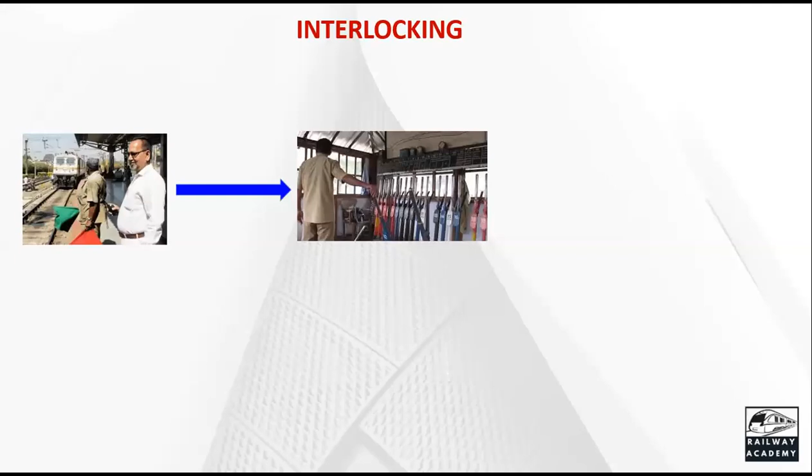In earlier days, we had mechanical interlocking. A lever man used to be there, a cabin man used to be there. You might have seen some old movies where you will come across lever frames. Nowadays, they are almost obsolete. Indian Railway has very few installations using the lever frame. This human machine interface may be a mechanical one, or a panel, or a touch screen.

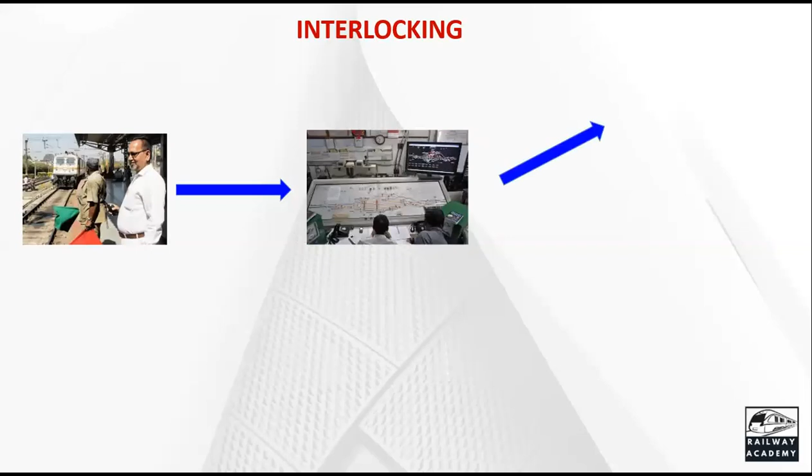With which components is he interacting? He is interacting with points. He is interacting with level crossing gates. Finally, he will take off the signal. Achieving the safety, a signal will be taken off as per the command given by the station master. As I mentioned, the station master is not interested to know what type of interlocking you are using. He is assisted by the safety system.

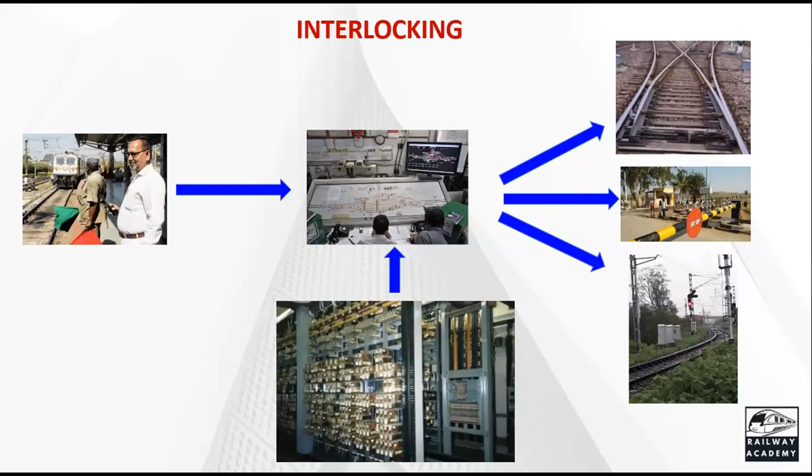Those safety systems were the mechanical lever frame, with a set of locking below this lever frame. In earlier days, we had it. Then came the next generation, relay interlocking. Then came the present one, electronic interlocking, which we'll be studying. With electronic interlocking, we are achieving safety to the highest level.

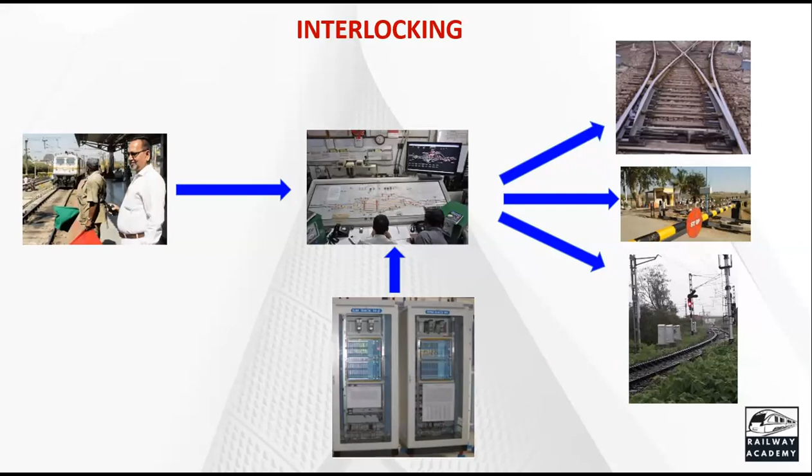The safety level is highest with the electronic interlocking system or computer-based interlocking system, where we say it is safety integrity level 4, SIL 4. All the components of electronic interlocking, computer-based interlocking or communication-based interlocking are suitable for SIL 4. They are certified for SIL 4, safety integrity level.

Interlocking is a process. In olden days, probably our grandmothers used to cook the food on the chula. And this chula was almost made in the house itself. The ladies used to make it, or maybe some gents in the house used to help them to prepare it. For example, they are preparing the rice.

To prepare the rice, what are the ingredients? We want raw rice, water, and a vessel. To cook it, a fuel. So these are the ingredients and the process is through the fuel. The wood was used for cooking the rice. And as you know, most of you might have seen your grandmothers cooking this. The complete house will be having smoke, people will be coughing. And that was the reason why this was afterwards ruled out.

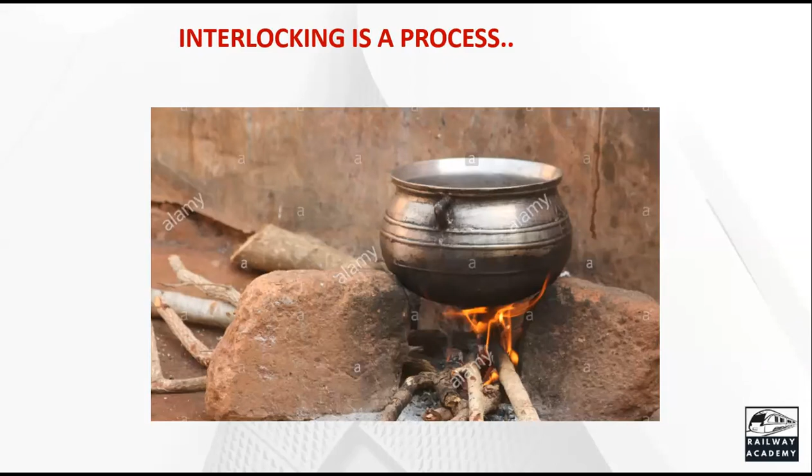Next generation came this pump stove with the kerosene. But the ingredients remain the same. Same raw rice, same water, and same vessel. But the process changed, the fuel changed. The advantage of the chula was, if there is any damage, the people in the house used to repair it. Probably your grandmother used to repair it. Or sometimes she will call you, young boys and girls, and you used to repair it.

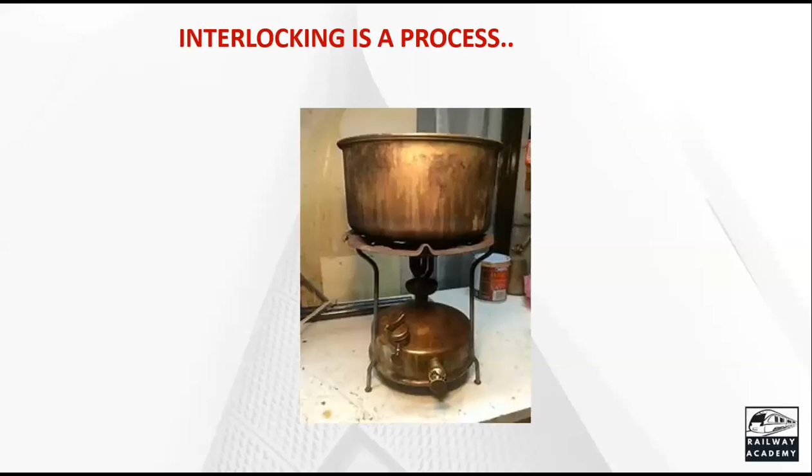Once this stove came, if there is a leakage of the pressure, probably you used to take it for repair. Slowly, an external agency is added here to repair the pump stove, kerosene stove. Next generation came with the LPG stove, which is soundless, no pollution, but the ingredients remain the same. The same water, same raw rice, and same vessel. Only the process changes. And our involvement in repairing this is almost nil.

If the LPG stove is not functioning, we will call an external guy who repairs it. He will charge visiting fees, plus he will repair it and charge for the parts, whatever he is replacing. Next came the micro oven. Presently, you are working with the micro oven. The same rice is cooked, the same raw rice, same water, same vessel, but the process is changed.

It means as the technology advances, even though the ingredients are the same, the process is differing. And as you advance in the process, our involvement is less. If the micro oven is becoming defective, we will not dare to touch it. We will straightway go to the vendor who has sold it to us. If it is during the warranty, he will replace it or repair it. Otherwise, you have to condemn it and purchase another one off the shelf.

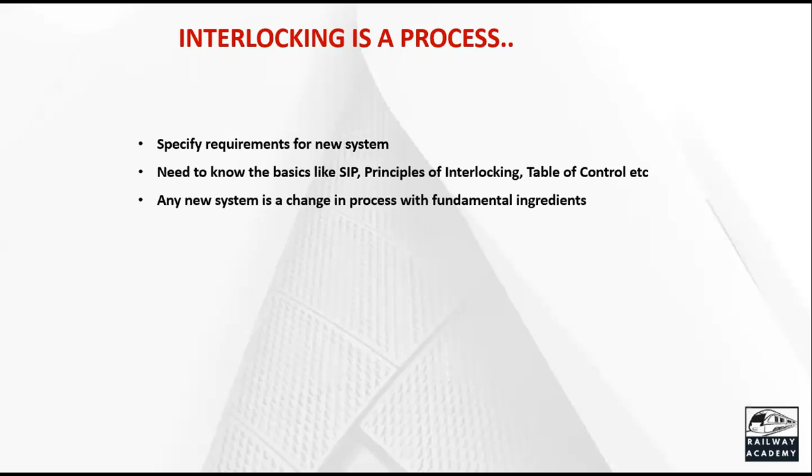They have not changed. Any new system is a change in the process with fundamental ingredients. The ingredients are the same. Only the process will change. From firewood cooking to electronic interlocking or computer-based interlocking, the process has changed. But the fundamentals remain the same.

Our involvement is less. That is an advantage. The greatest advantage in the advanced technologies: our involvement is less. Getting knowledge is very good. We have to learn everything. But the best thing, in my opinion, is let us understand what to learn, what not to learn, what to study, what not to study. The thing which I'm not connected with, I'm not manufacturing it, I'm not maintaining it, there is no use of studying about that.

Let us study the topics which are adopted well by us, like preparation of SIP, principles of interlocking, table of control. Based on that, developing the application logic, comparing it, conducting the factory acceptance test, conducting the site acceptance test. If those things are learned, that is quite enough. Instead of going more into the detail, what are the cards, what are the components in each card, how they are prepared, it is not our food at all. It is not our cup of tea at all.

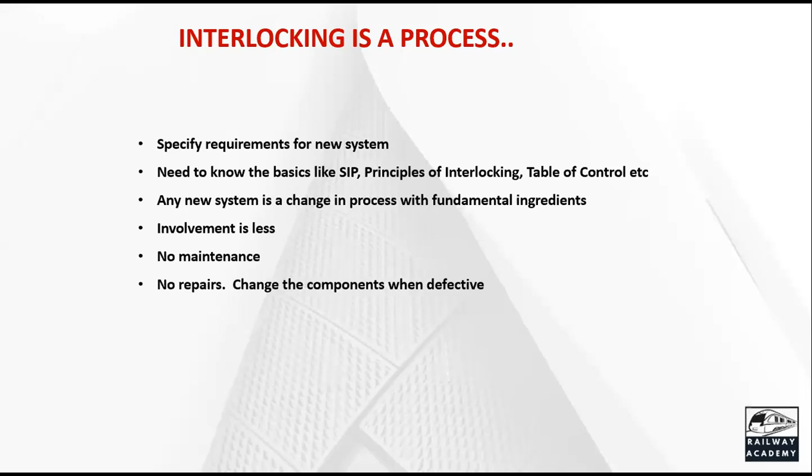No maintenance. All new equipments are going with this. No maintenance or less maintenance. No repairs. Change the components when defective. That is another advantage. If a card is defective, just remove it and put another card. It works. You need not repair the components.

Self-diagnostic. In olden days, we used to go to the doctor to measure our blood pressure. The doctor used to put some pata on our left arm, and he will pump, and he will tell, oh, you are having very high BP, you have to take some medicines, stop salt. All such things the doctor will be telling us. But now you have the machine which can be kept in the home. You can measure your blood pressure on your own. You need not go to a doctor.

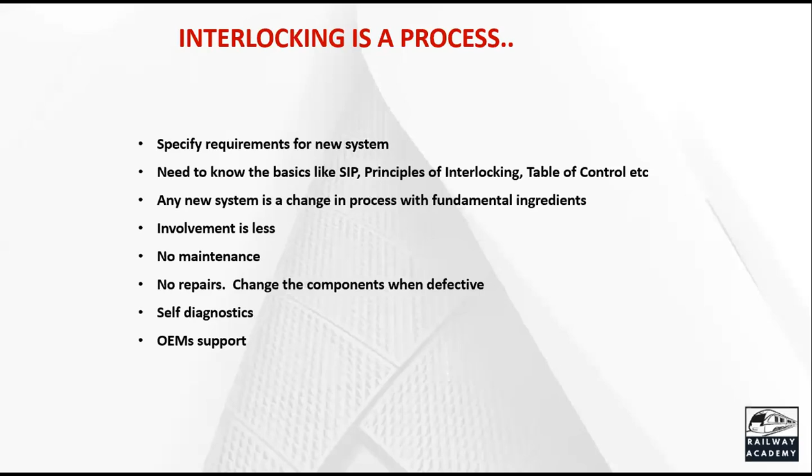Self-diagnostic. The system will diagnose itself. It will tell this is the fault. This is the problem. Attend to that. So there is another advantage of the advanced technologies. OEM support: original equipment manufacturers who are all manufacturing this advanced system like electronic interlocking or computer-based interlocking, they will be supported.

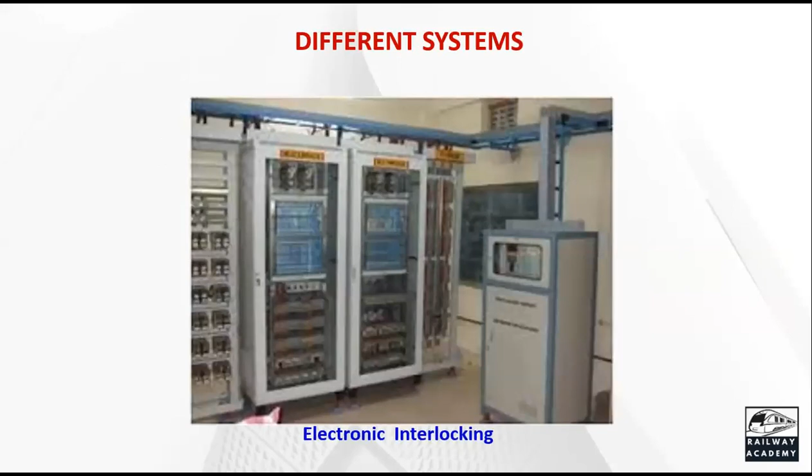This was the mechanical interlocking. Next came the relay interlocking. And now we are having electronic interlocking. I have taken the photograph of one particular product. There are different products we'll be discussing here. What are the different products of the electronic interlocking?

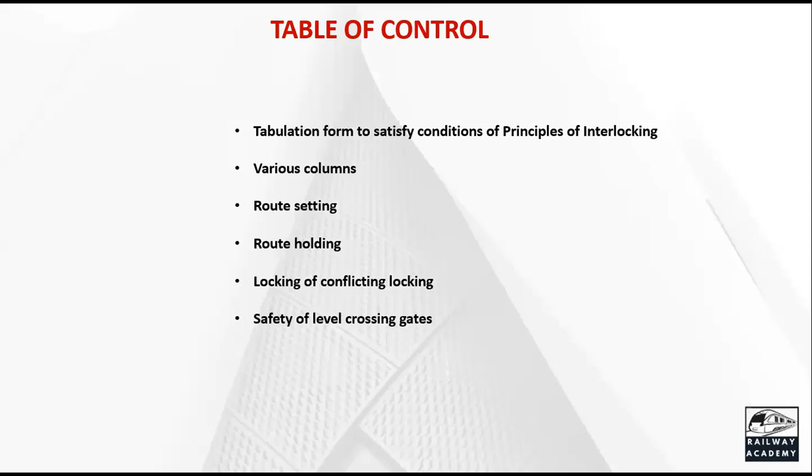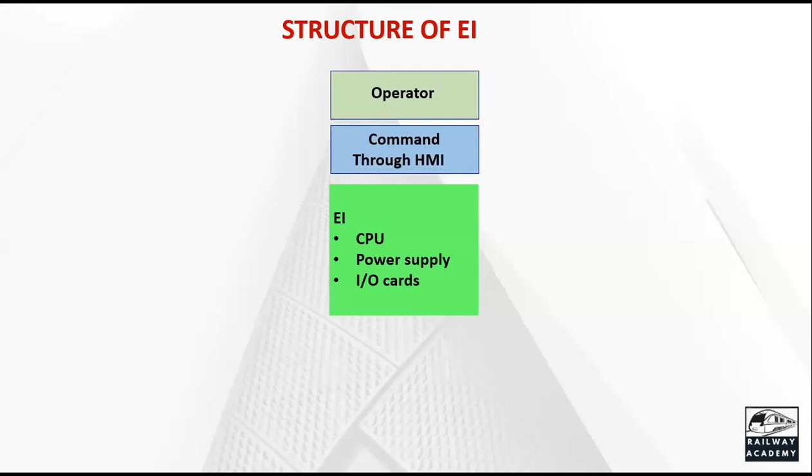The heart of that is the CPU, Central Processing Unit. Naturally, it requires a power supply. More important is input-output cards, for which we have to decide what inputs are to be given and what are the outputs from that. What are the inputs? We will take the inputs from the field.

It's very interesting to know here that these inputs were the same in mechanical interlocking, are the same in relay interlocking, and also are the same in electronic equipment: electronic interlocking, even computer-based interlocking or communication-based train control system equipment. Inputs are the same. What are the inputs?

Point indication, in which position the point is set. Signal readback indication, what aspect the signal is displaying; whether the track is occupied or clear; and whether the level crossing gate is closed or open. These are the field inputs.

Taking these field inputs, based on the command issued by the station master, the electronic equipment processes the logic, which is based on the table of control. And if everything is okay, if it is safe, it gives the output to operate the point, to take off the signal, and also before that, closing of the level crossing gate ensures whether the gate can be opened or the gate needs to be closed.

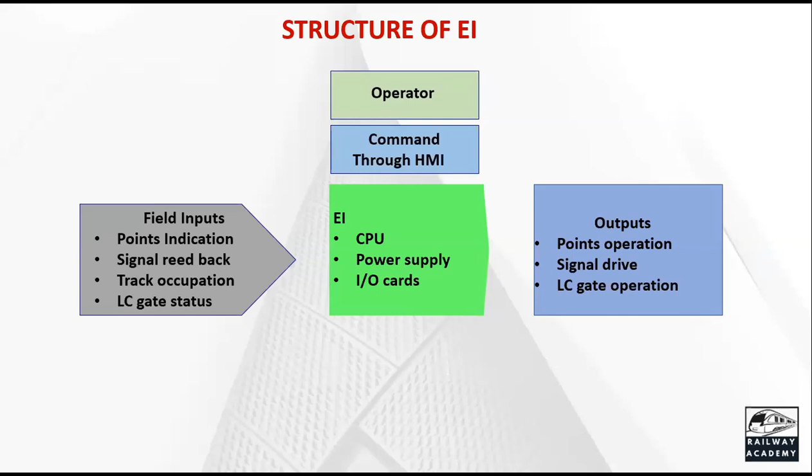And actually, we need to give feedback to the operator, the station master: what is the point setting, in what position the point is set, what is the route on which he is receiving a train, the portion of the route, whether the track is occupied or not. As a colour light signal goes, the station master needs to know what is the aspect displayed by the signal at location, a signal indication, and whether the level crossing gate is closed or open.

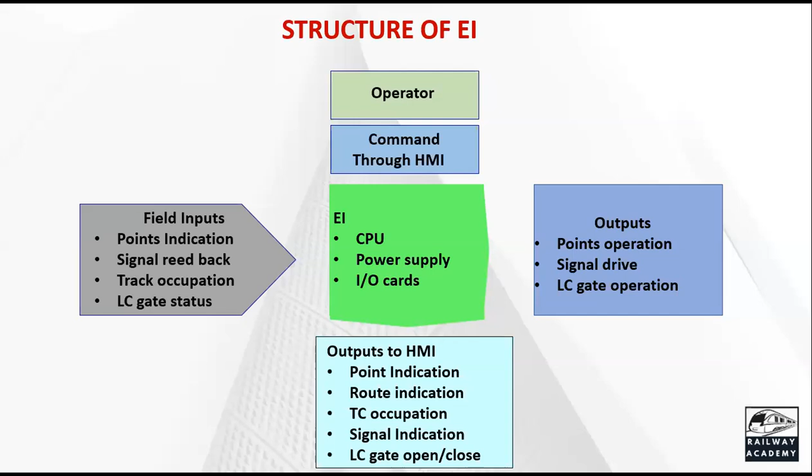This is the structure of electronic interlocking. We are more interested in the input-output cards, which are based on field inputs and field outputs. We are also interested in how the information is to be given to the station master, and the CPU consisting of application logic, how the application logic is prepared.

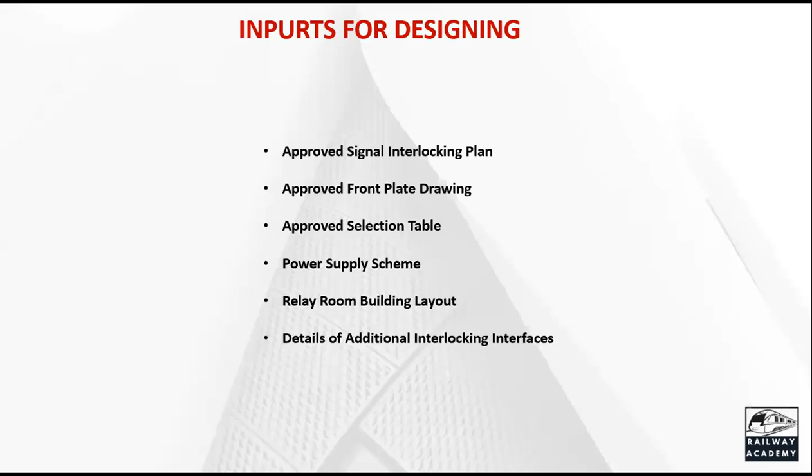Then the relay room building layout is part of the designing document: where the EI equipment should be placed, where the data logger is to be placed, how it has to integrate with the relays, external relays, and where is the power supply room, equipment room. A relay room building layout is a part of designing of the EI system. Details of additional interlocking interfaces attached to this: maybe this particular station EI may be communicating with other electronic equipment. How that has to be given.

Now coming to the vital inputs and non-vital inputs. In general, all the inputs and outputs from the external gear are taken as vital, like point indications, signal feedback indication, track circuit indication, level crossing gate open or closed indication; all belonging to the field are taken as vital inputs.

Equally, vital outputs are the same. To operate the point, a command is to be given. To open the level crossing gate, a command is to be given. Changing the signal aspect, a command is to be issued. They are all vital outputs. In general, those connected with the external gears are vital inputs or outputs. They are vital information. We take extra care for this by giving a double cutting.

I hope most of you are signal engineers. You might have learned what you mean by double cutting. And it is because of safety that we go with double cutting for vital inputs or vital outputs.

Now coming to non-vital. Non-vital in general is connected to the operating panel, human-machine interface. Whatever command the station master is issuing, that is taken as input for the electronic interlocking, a non-vital input. Once the points are set, once the signal is taken off, we give the information to the station master: in what position the point is set and what signal aspect it is displaying at site. They are the non-vital outputs.

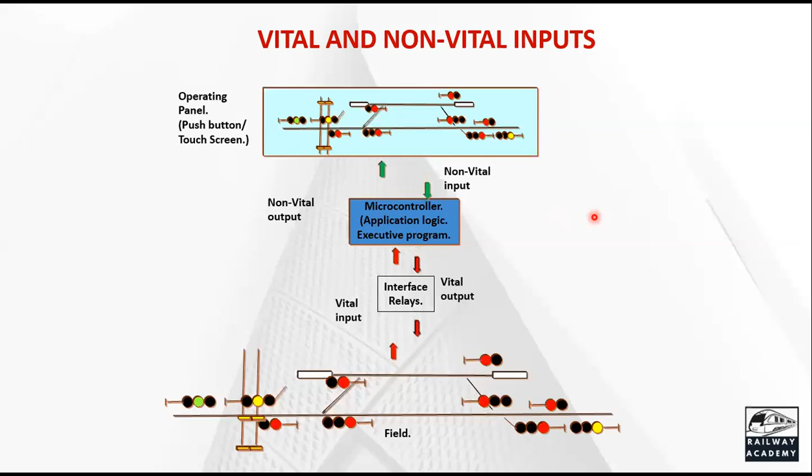You have a control panel. From there, you are going to the electronic interlocking system, which operates the relays through the relay interface. The field gears are operated. And again, we have the operating VDU and the maintainer's VDU. The maintainer can only see what is happening. He cannot give commands, but it will help him to diagnose whether the fault is internal or external.

The operating VDU is, as you see, a normal visual display unit like a TV screen or a computer screen through which the station master will know what is happening in the field.

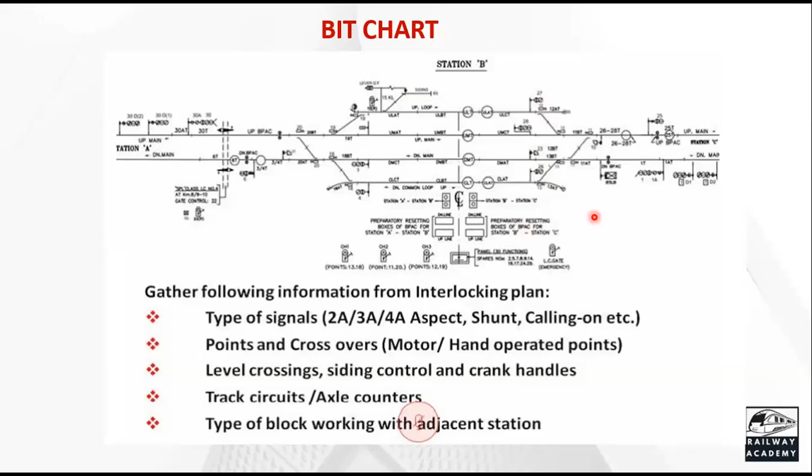And the indications given to this panel are non-vital outputs: track indication, point indication, level crossing gate indication, route set indication, route clear indication. Different indications are provided from the electronic equipment as non-vital outputs.

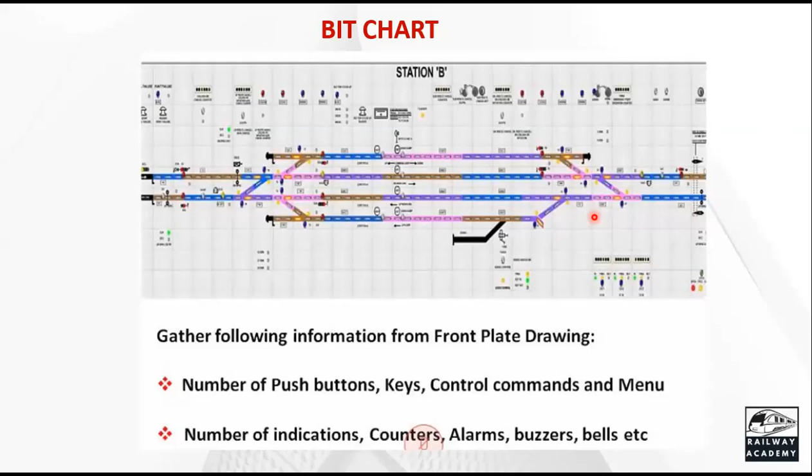This is called a bit chart. Now, what is a bit? A bit is nothing but a relay contact. Probably most of you are aware of relay interlocking. In relay interlocking, for the contacts we are using, each relay is taken as 1 bit.

So this bit chart is the basic, fundamental document to be prepared for electronic interlocking, which is based on the signal interlocking plan and also on the operating panel diagram, the front plate diagram. In the detailed training course, we will learn about it. You will be preparing a bit chart.

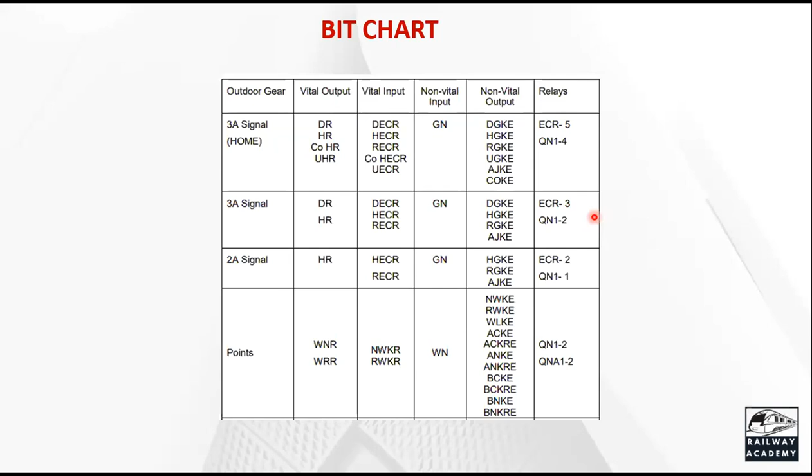As I said, irrespective of the product Indian Railways or railways across the world are using, the documents generally prepared by signal designers will be discussed in the detailed class. You will have an exercise on this; the trainer will tell you how to prepare it. To complete the training successfully, it is necessary for all of you to do the exercises given. You will be the perfect designer for electronic interlocking.

There is a centralized system and a distributed system. Let us also understand the concept of the object controller, which is used in electronic interlocking. What are object controllers? It can be a centralized system or a distributed system with object controllers.

What is the advantage of this? In the absence of the object controller, we have to lay cable from the central relay room to all the gears here. Kilometers of cables are used, and the cables are very costly.

A major chunk of the project amount used to go only for cables, purchasing the cable and laying the cable. Now, with the advancement of optic fiber communication, it is very easy for us to communicate with the object controller. And controlling from object controller to field gear, even though it is a physical signaling cable, the length is very less. Drastically, the expenditure is coming down.

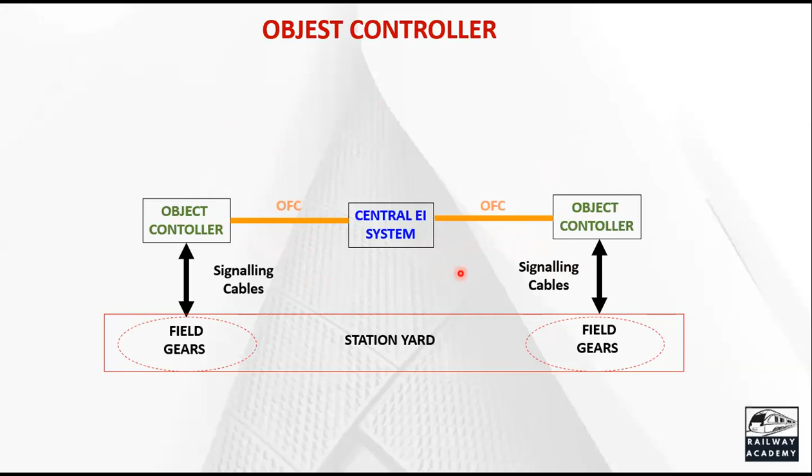There are two types of software here. As far as electronic interlocking is concerned, there are two types of software: one is executive software and another one is application software. Executive software satisfies the principles of interlocking and is common for a particular product. Whatever name different companies give it, it is the same for all the equipment, like your operating system.

Application software is specific to a particular station. As designers, we need to prepare this application software. Based on what? Based on the table of control, based on the SIP, based on the bit chart, we will prepare the application software. The more detailed training will cover what the application software is, what its flow is, and how it is prepared.

As you know, the operating systems are different for Android and for your other systems. In the same fashion, the application software is different, with different languages for the different OEM manufacturers, which we will not be covering in detail. We will only cover the application software structure and how it is prepared. Maybe one or two examples of a particular product will be given.

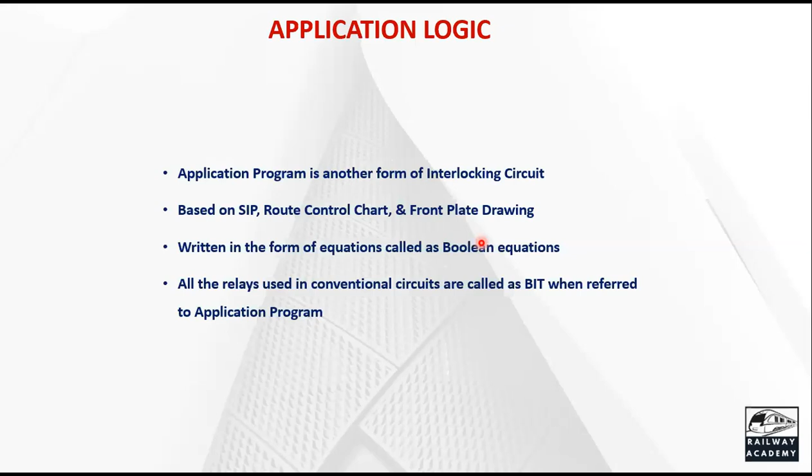Once you write an application logic, like in your C language or C++ language, after writing the logic, you compile it. There is a compiler, and the compiler will give you the errors as far as the syntax is concerned: whether you have written correctly or not, whether you have used the correct syntax or not, only that much it gives. But it will not tell you whether the program written is suitable for the vendor or for the user. That is not being done.

And more importantly, it is unique for each station. As most of you are aware of signal engineering, the table of control is prepared for each station and it is unique for a particular station. All the stations have the same points, same level crossing gates, same signals, same track circuits, but the table of control differs. I cannot use the table of control of station A for station B. It has to be prepared on its own, separately.

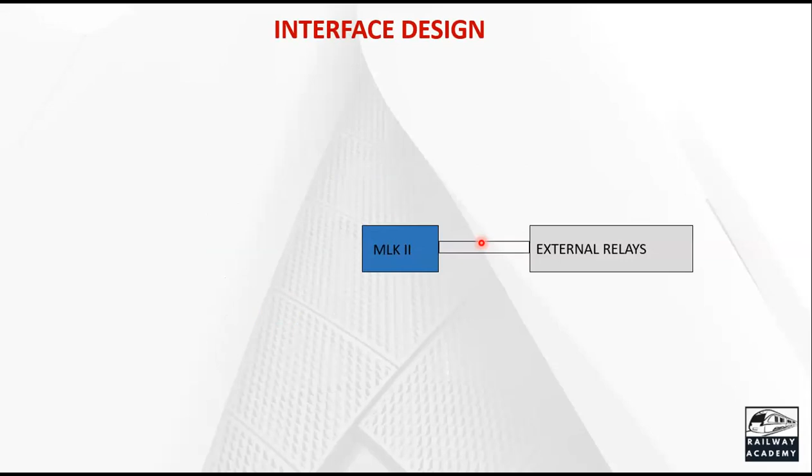Interfacing design. I have taken the example of Microlock here, Hitachi make electronic equipment, which will be interacting with external relays, that is interfacing relays, and the cable termination board, from where you will take the information connected to the station master operating panel. And it also comes with the power supply. What power supply do I need? These are the external peripherals. Apart from this, the external peripherals may be other electronic equipment systems with which it is communicating. That also becomes an external peripheral. How to connect it? What is the program we have to write for that? All those details we will be studying in the detailed training program.

There are more messages. I hope Sumit is giving them suitable answers. The other queries, probably I will attend to them once I go to the questions and answers.

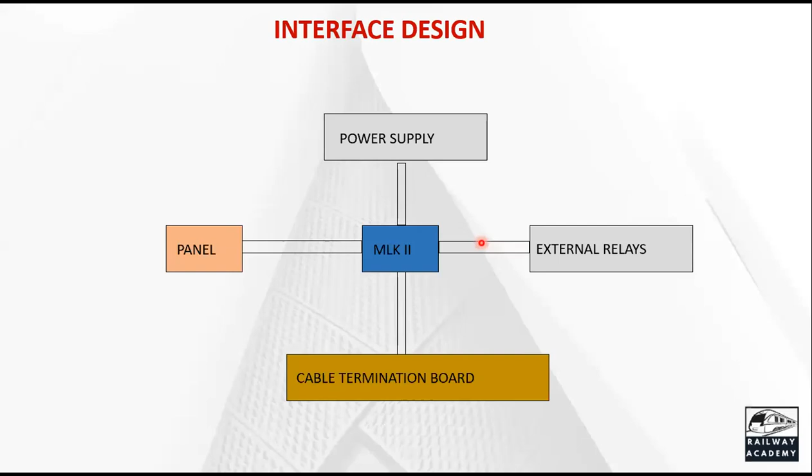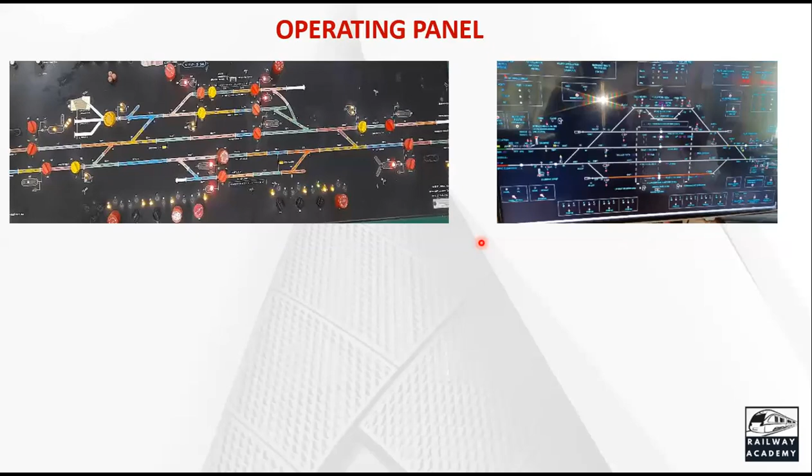So this is the operating panel, maybe with knobs. I have taken it with knobs. Behind this, maybe relay interlocking or electronic interlocking, it does not matter. But this is the operating panel. This operating panel can be a video also, or it can be a press button type. So these are the different operating panels, VDUs or human machine interfaces, which have to be integrated and connected with the electronic equipment.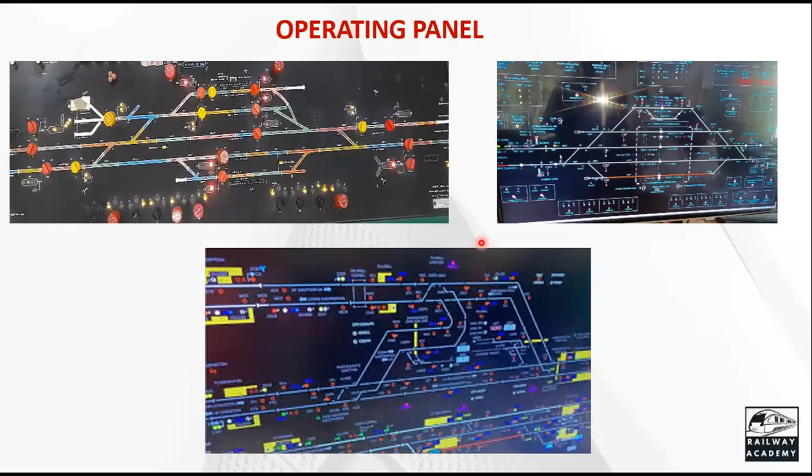Electronic interlocking: what are the different tests we have to conduct here? Number one is the factory acceptance test. The factory acceptance test is conducted in the factory, as the name goes. Whatever application logic I have written, whether it is safe to work or not, will be checked at the factory acceptance test. Before any product comes out, maybe a ceiling fan, a microwave oven, an electric iron, whatever equipment is manufactured in factories, it has been tested for correct performance. The integrity of the interlocking inside the EI designed for a specific station is tested in the factory environment.

Site acceptance test: fine, it is good in the factory. In the factory, I test it with a simulation. But once I connect it at site with the interfacing equipment like points, signals, level crossing gates, track circuits, whether the application logic we have prepared will work satisfactorily or not, that is the site acceptance test.

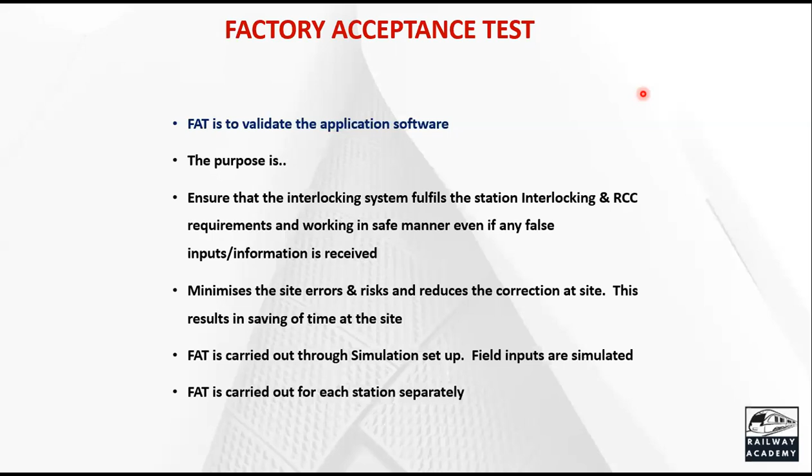We can reduce the time, especially the NI time, non-interlocking time, because during non-interlocking the trains are getting delayed. Trains have to be piloted. Points have to be set locally. I hope most of you are signal engineers and are aware of what NI working means. FAT is carried out through a simulation setup. Field inputs are simulated. FAT is carried out only through the video panel, whereas site testing is carried out through the CCIP, the control cum indication panel, and video panels, if both operations are available at site. You can connect it to the CCIP and also the video, that is SAT.

To speed up the testing, the timer values are modified from 120 seconds to 12 seconds, because when you do a cancellation, it takes 2 minutes, 120 seconds. To speed up the time, that will be adjusted to 12 seconds during the FAT. IO boards are also simulated. No hardware will be connected. The input and output boards are simulated here. Field inputs and outputs are disabled and will be directly delivered into the simulator video. That is under FAT.

Various inputs are required to perform FAT. In the detailed training program, we will be giving you the different inputs you require to conduct a FAT. FAT is carried out only through the video panel, whereas SAT is carried out through the CCIP. I hope this is repeating. Yeah, this is the factory acceptance test, how it is being done. You can see one photograph here. Here you can see the table of control and different panels. So a detailed procedure is done for FAT.

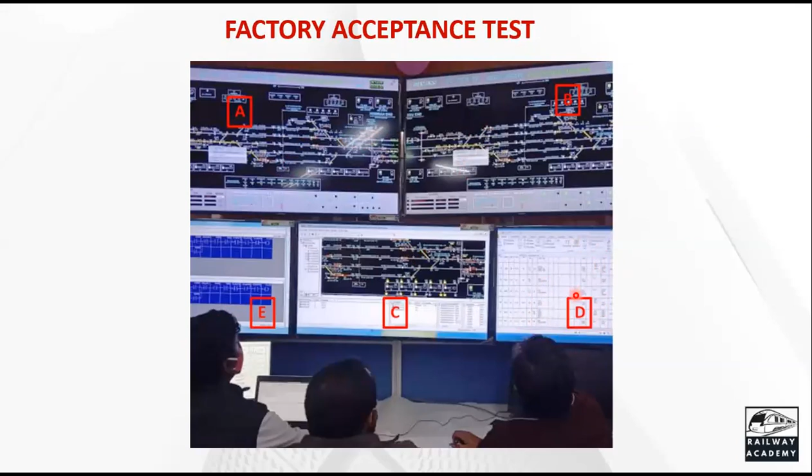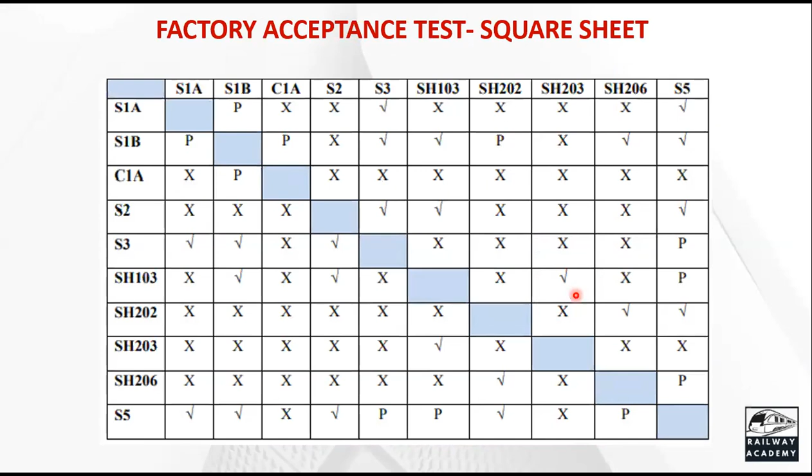Now this is the square sheet method. The square sheet method generally covers the conflicting signal locking: how the conflicting signals are to be locked, which signal is to be locked, which signal need not be locked. That will be tested through the square sheet method while doing the FAT.

Now coming to SAT, site acceptance test. In SAT, similar tests are performed at site with the electronic interlocking equipment, hardware, and simulation panel in the first stage. We'll again put in only a simulation panel in the first stage and we'll test it.

Correspondence and interface tests are also performed after interfacing the field gears. What is correspondence? If the knob on the panel or the command for the point is given in the normal, whether the point is also in the normal or not in the field, that is called correspondence. The command given and the state of the gear at site, whether they are corresponding or not, matching or not, that is done in a correspondence test.

Any other test may also be conducted as required by the vendors. Logic and interlocking test, control table and cross table will again be checked at SAT, site acceptance test. Interface and equipment functional test, intercommunication test between subracks also will be conducted during SAT, a laborious process. Because the person who conducts the test has to certify the system is safe to run a train. So before signing the safety certificate, the railway officer has to test it doubly and ensure that it is quite safe.

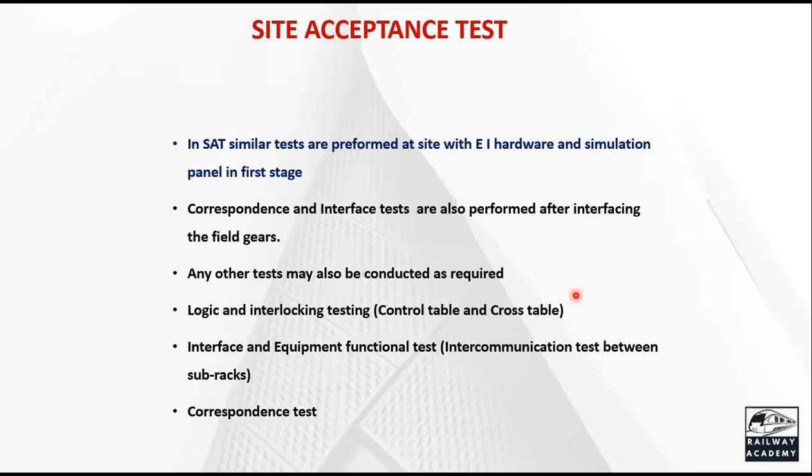SAT defines the procedure for site testing of station interlocking system for safety in the site environment, depending upon the site equipment, whether it is safe or not. SAT mainly involves system integrity and functional tests. What are the different functional tests we conduct here? Negative testing of signals, positive setting of signals, track locking, approach locking, indication locking, back locking, sectional route release. Everything will be tested in the site acceptance test.

Interlocking test shall be carried out with full setup except the track side equipment, carried out for each station separately. As we already mentioned, the application logic itself is different for each station. Equally, the SAT also will be carried out separately for each station. SAT ensures all the equipment installed at site are functioning correctly and working in a safe manner. Site acceptance test is the last in the series. Once SAT is done and satisfied, the equipment will be used for commissioning. It ensures overall system safety and an error-free system.

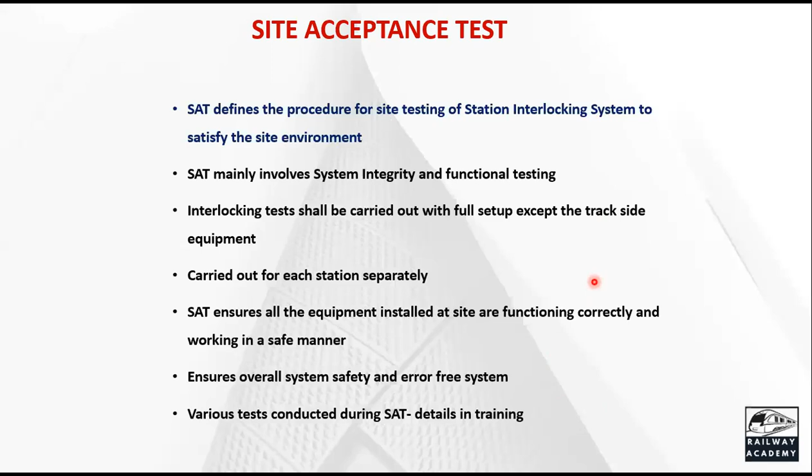The various tests conducted during SAT will be detailed in the training. We'll be covering them in more detail in the coming classes. So this is how the SAT is conducted. A logic rack is connected to the electronic interlocking system, operating panel, maintenance panel, and the data logger input, which also will be tested during the SAT. The relay interlocking will be taken as input, and the relay output also will be tested during the SAT, which we will learn more in detail in the coming classes.

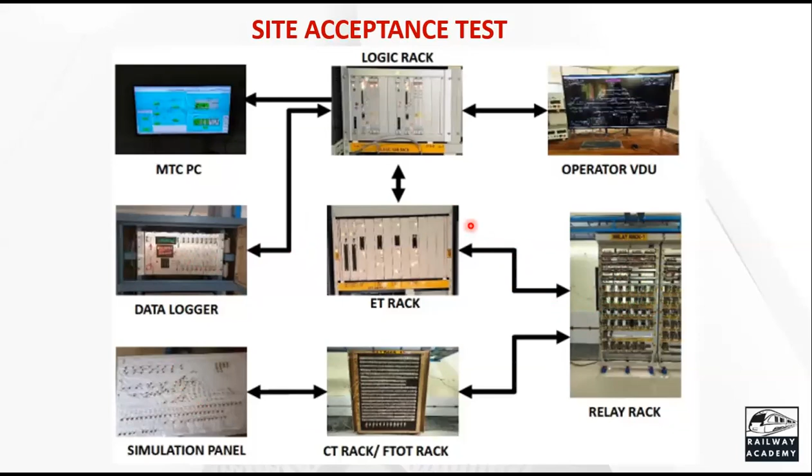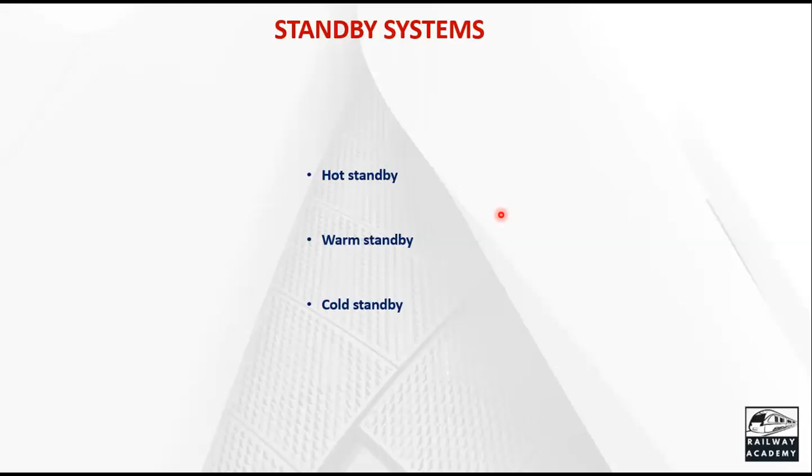There are different standbys: hot standby, warm standby, cold standby. Where we have to use hot standby, where we use warm standby, the advantages, disadvantages, and how much money is involved, we will learn in the detailed training. We also learn about troubleshooting, where problems may arise. And maintenance of electronic equipment. Though we claim it needs no maintenance at all, still some maintenance is carried out on electronic interlocking systems, which we'll cover in more detail in the coming training.

Earthing arrangements, what should be the earthing procedure, how the earth should be given, and what should be the maximum earth resistance, will all be covered in the detailed training program. Especially wherever electronic equipment is used in signaling, earthing is very important, and with railway electrification, earthing plays a major role. In earlier days earthing was not playing an important role, but nowadays it is. The earth resistance has to be maintained within the limits. Knowledge of testing procedures, and troubleshooting.

Now coming to the prerequisites to attend this training. Very important. Number one, you need to know the basics of computers. I hope it is very common nowadays; even first grade and second grade kids are learning the basics of computers. You need to know how to operate a computer, how to save a file, how to copy.